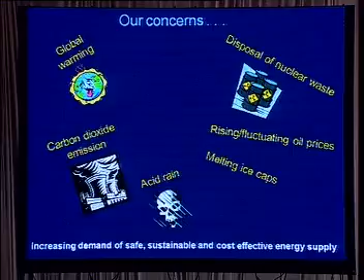So basically I'll be talking about high performance, lightweight, flexible solar modules, which are quite different from the ones you often see in the market. I'm not going to talk about all these concerns; you are probably aware of them. But I will tell you that when we look at the topmost problem facing humanity for the next 50 years, sustainable energy is the number one problem. Drinking water is the number two problem. There are many problems linked to energy. As you know, very often wars are fought only for energy.

Of course, there are various forms of energy, but we are talking about an energy which is safe and sustainable, and which will be abundant for mankind to use for comfort and to meet essential demands. The sun is the abundant source of energy and of the existence of mankind. Our planet Earth evolved from the sun and our life is all governed by the sun. Within 1 hour, our Earth receives enough energy to meet the global demand for 1 year. So there is no shortage of energy. We simply have to look up to the sky.

The sun is shining somewhere. There is no need to dig the earth to bring out fossil fuels or to still go for coal. People say oil and fossil fuels are abundant, there is no shortage, you can keep on burning, polluting the whole world. But one has to also look at the Stone Age. The Stone Age did not end because of a lack of stones. We are intelligent human beings. We should use our minds to see what is sensible, and the sensible thing is to use this abundant solar energy for the benefit of society.

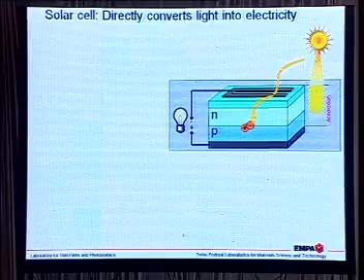It creates electron-hole pairs. Electrons are negative charges, holes are positive, and these charges get separated and move in opposite directions. Electricity is nothing but flow of electrons in a particular direction, and we have so-called solar electricity. So this is how the solar cell works: you have a device you expose to light, it creates electron-hole pairs which get separated because of the internal field, and then you have your solar electricity.

The most popular and well-established technology is based on silicon wafers. This is what you see. One silicon wafer solar cell is like one battery. It gives you roughly about 600 millivolts, or 0.6 volt, and you can connect them in series to get higher voltage and also to have some current.

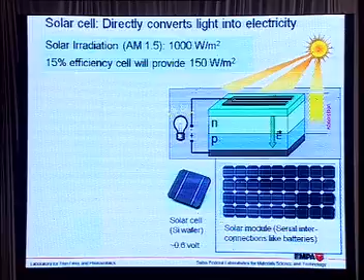This is called a solar module, and you might have seen them installed in many places. What we talk about very often is the efficiency. Just to give you an example, when there is very nice sunlight like today, it will have 1 kilowatt per square meter of solar irradiation. So if we have 15% efficiency, and 1 square meter of module, it means we will have 150 watts. This is just to give you the relevance of efficiency.

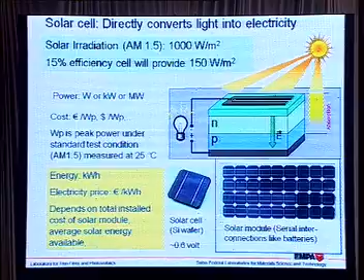When we want to use it for practical applications, we have to talk about the cost, given either in dollar per watt, euro per watt, or rupees per watt. When talking about electricity price, we talk about price per kilowatt hour, also called 1 unit. Here in India, it might be maybe 4 or 10 or 15 rupees per unit. So when you pay your electricity bill, you normally pay for the kilowatt hours you spend.

All the solar modules you see can be categorized into 3 types of installations. One is utility scale, meaning very large volume, some megawatts or tens of megawatts. These solar modules are installed in open fields, so they are called ground mount systems - very high volume capacity solar module installations. Then they can also be applied on the rooftop of residential, industrial, and commercial buildings. These are called photovoltaics applied on buildings.

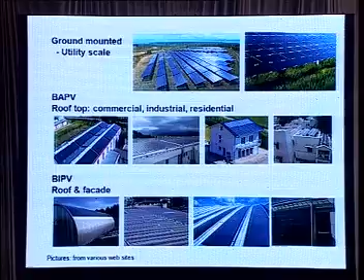Then there is another category where you use photovoltaic integrated elements - the roof or the facade, the wall itself is integrated with solar modules. This is called BIPV. In India, solar module installations are booming, and they are mostly ground mount utility scale. Building related applications are still not that popular or not in strong volume yet.

When it comes to the cost of solar electricity, here is one example. As you know, in Dubai they have an abundance of oil. So one would wonder why Dubai should go for solar electricity. They have oil, but they are thinking for the future - oil will end, and it creates pollution.

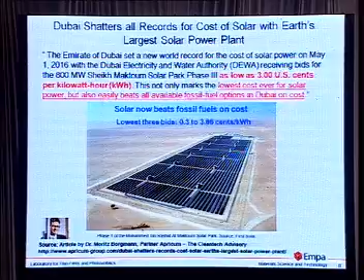So this is the cheapest bid which has been made, of 3 American cents. I think $1 US is roughly about 61 rupees, so you can calculate. This price of electricity in Dubai is cheaper than fossil fuel. So it means solar electricity, even in Dubai, which is full of oil, can be very competitive.

This was in 2016, I think, and within the beginning or middle of 2016, actually in May, within 6 months, the progress happened that the price went down to even 1.8 US cents per kilowatt hour. And that's not in Dubai, but in Denmark, Germany, where there is not so much sunshine compared to India or even Dubai. So it means solar photovoltaic technology is getting very cost competitive on a global scale, even in conditions where there isn't abundance of high solar insolation.

So when people ask whether this technology will work or not, these are the examples that answer the question of whether this cost-effective, clean, sustainable technology is working - it is no more a question. The solutions are already there. Now we have to see how we implement them and how we use them for various applications.

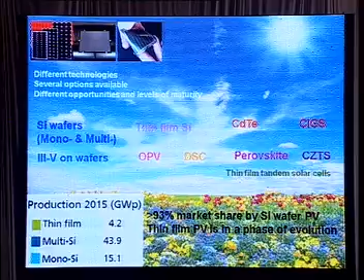In the field of photovoltaics, there are many materials, and these are called different technologies. One is, as I mentioned, silicon wafer-based technology - this is the most abundant technology. Almost 93% of the market share is taken by silicon wafer-based technologies. Then there are some other new technologies based on thin films and other new materials which I will be talking about - how they are useful and what potential they have.

At Empa, in our research lab, we work on cadmium telluride, CIGS, kesterites, perovskites, and thin film tandem solar cells.

Our research group of about 35 people are involved in various technologies, but we are focusing today's talk mostly on CIGS. When we look at the different generations of technology, the first generation, which is about 58 or 59 years old, is based on silicon wafers. These are like single pieces put together. They have been very successful. 93% of the market share is based on silicon wafer, but they have certain limitations, which I'll explain.

That's why we are looking for new materials or innovative concepts. The costs of silicon wafer-based modules have already gone down, and there is limited opportunity to further reduce the cost. The second generation of technologies are based on thin films. These are very thin coatings, less than the human hair thickness. Human hair thickness is about 50 microns, so we're talking about 1/10 of that, applied on glass, metal, or polymer film.

This is called thin film technology, and when you see some TVs, for example, or colored glasses, these are based on thin film coatings. If you replace glass with foils, you get additional advantages, like thin film flexible solar cells, and my talk will focus on this type of technology. There are also some new concepts based on organic materials, and I believe they are still far away from commercialization.

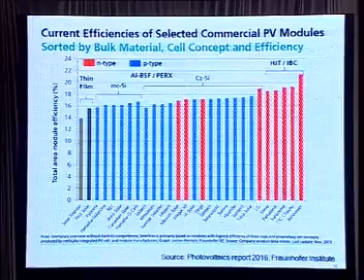These are some typical efficiencies of single crystal, multi-crystalline, and thin films. Thin film modules are somewhat lower in efficiency, but there is good reason to work on that. The efficiency difference of thin film is roughly 14 to 16% compared to multi-crystalline silicon, which is 16 to 18%. So roughly a 2 to 3% efficiency gap.

So why should one work on or think of thin film solar modules? First, crystalline silicon wafers require roughly 200 micron thick material because they have a very low absorption coefficient. Thin film materials have a very high absorption coefficient, so roughly 1 or 2 microns of material, almost 100 times thinner, is adequate to absorb all the light we want to convert into electricity.

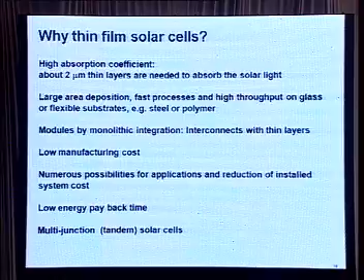One can have these coatings on glass, steel, or polymer films, and make monolithic interconnect modules—I'll show you what that means. Basically, it's a very nice, elegant, and fast way of interconnecting different types of solar cells. It has potential for low-cost manufacturing, lower than silicon wafer-based technology, because it takes a very small amount of energy to produce these modules. It also opens up various application opportunities that are difficult with traditional silicon wafer-based modules.

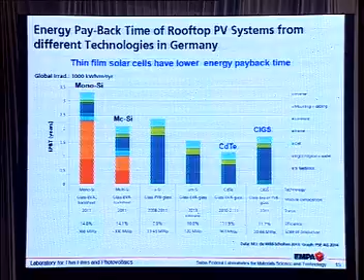What I mentioned was an advantage of thin film, and most important is the energy payback time. Of course, price is important, but sometimes if your daddy is very rich and can give you subsidy and support—like solar modules made in China are cheaper than anywhere else because the Chinese government gives a strong subsidy—somebody can sell at less than the production cost. But what's important is that the real cost is actually the energy. So what is the energy payback time? That's what you see here.

The energy payback time of cadmium telluride or CIGS thin film solar modules is significantly lower, typically 1.5 up to 2 years, compared to monocrystalline or multicrystalline silicon, which is typically about 2 to 3 years when efficiencies were still low. So we're comparing about 15% single crystal silicon versus about 11 or 12% cadmium telluride. Despite the lower efficiency of thin film solar modules, they have a shorter energy payback time because they take less energy to produce—it takes a lot of energy to purify silicon from sand to make electronic quality silicon.

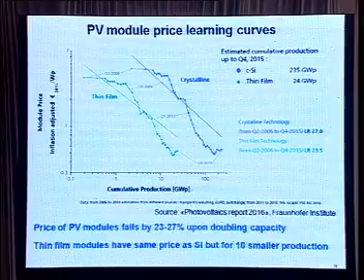So this is about pricing. The dark blue curve shows how the price of silicon has come down to about 45 cents per watt when factories reach about 100 gigawatt cumulative production. In case of thin film, even at a smaller production of about 10 gigawatt, you have significantly lower cost. So you don't have to invest in very big factories to reach a cost-competitive level. This is yet another advantage of thin film technology.

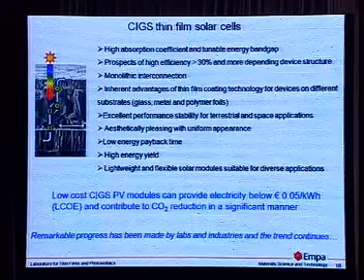Why we want to work on CIGS thin films: it has a high absorption coefficient, and the device structure is roughly 3 to 4 microns, about 1/10th of a human hair. We have fast coatings applied on large area, which gives very low energy payback time. It can be as efficient as multicrystalline silicon, as shown in research labs, and it will reach significantly lower production cost of electricity, below 5 euro cents per kilowatt hour.

It will have significant possibility to give CO2 footprint reduction. We are talking about technologies which will help reduce carbon emissions, and this type of technology has a very low CO2 footprint. So this is yet another advantage of thin film technology.

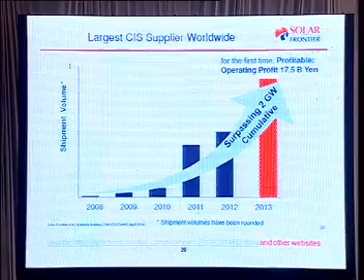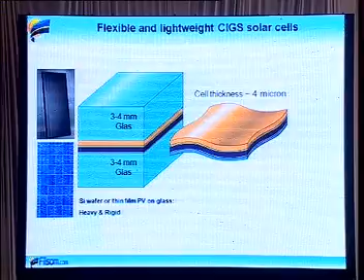When we compare traditional solar modules based on silicon wafer or thin films on glass, they are heavy and rigid. Actually, silicon wafers are very fragile - if you hold them, you can literally break them like this. So they need very special packaging and very good care until you make modules out of that.

And if you replace the glass with foil, then you have the possibility of making a flexible solar module.

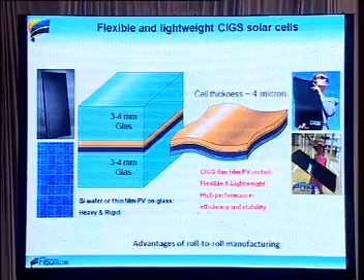If I take the traditional solar module, crystalline silicon on glass, 1 square meter will weigh anywhere from 12 up to 20 kilograms. It's quite heavy - sometimes for one person it's difficult to hold. Here you see a 4-year-old daughter of my secretary, and she is able to lift this solar module. So it's very lightweight and flexible, and it can be produced with roll-to-roll manufacturing.

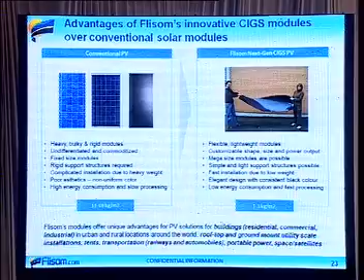These are some other summary points. It's not only about module weight and flexibility - imagine if you have to transport a solar module, let's say 1 megawatt, you'd need at least 5 or 6 large tanks to transport it. But if you have a roller type of carpet, you can transport solar modules easily in one big lorry or even one car. That gives additional advantages, reducing the cost of transportation and installation.

Another advantage relates to manufacturing, called roll-to-roll manufacturing. This means you take a roll of plastic or metal sheet, like a roll of cloth, and you unroll it and do the coating.

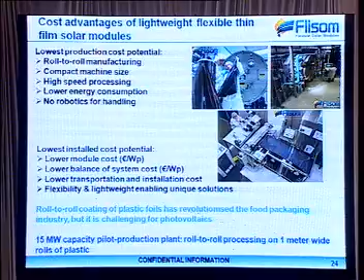How cheap can it become? I'll give you an example: when you buy a potato chips packet, it's nothing but plastic with a coating of some metal and oxides to protect against moisture. These coatings are done on rolls that are 5 or 8 meters wide, moving at very high speed, so they're very cheap. You eat the potato chips and throw the packet in the basket - that's how cheap they are.

So the idea is, can we transform this type of manufacturing for solar modules? It's going to be very challenging, like climbing Mount Everest, but sometimes you have to make an attempt. In academics, at the university, we make experiments - you can fail, but eventually you succeed. You keep trying, and then you get to very ambitious concepts.

This is roll-to-roll manufacturing, which is very innovative, and that's what we are trying to do with the company Flisom, which I established with my PhD students. One of our investors is actually the Tata Group company from India.

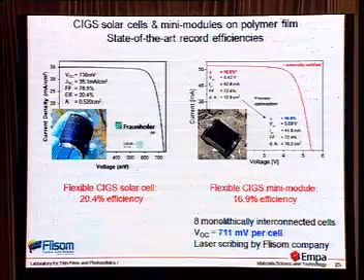So this is the research type of solar cell, and here what I'm showing you is a world record efficiency solar cell, which is 20.4% achieved, and this is independently certified efficiency measured from Fraunhofer Institute, developed in our research lab. What you see on the right side is actually a solar module. These are monolithically connected solar modules, so different solar cells are connected in series. So they are about 17% modules. So these efficiencies are as high as multicrystalline silicon.

So in our company Flisom, we have developed this whole manufacturing machine and plant. Coming from an academic environment, I would really like to encourage the young students, don't get afraid. When we did our research, it was a solar cell made on a fingertip size. And coming from the research labs, we are not equipment manufacturers. But we said, okay, my PhD students, we are not going to buy these commercial machines which do not work for these technologies. It will require about 100 millions. You can calculate how many, 1,000 crores rupees.

We said, let's do it step by step. We will make our own machines. And these PhD students, they were very courageous. We said, no matter, we will fail, fine, it's okay, we will try. If we fail once, we will learn, and then we will tell that, yeah, we tried, we failed, maybe we can do it better. If our effort is sincere, somebody is going to appreciate our failure. So take your courage, go with your conviction. Don't go for simple things that I can buy from here and be afraid that I will fail, what others will think.

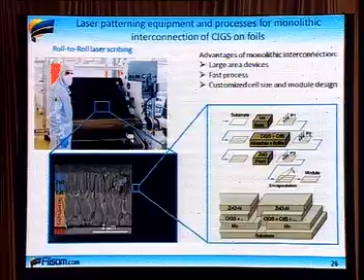No, when you make a very courageous step with all your sincerity, even if you fail, provided you are able to explain why you failed and what you learned, I'm telling you the world is going to appreciate, and that's what happened with our investors in Tata. Our research group is in Switzerland, and here is a company from India who understood the innovation in this technology. Despite all the risks, they joined our Swiss investors, and they have invested during the last 10 years continuously to translate from this research lab to a large industrial production of solar modules, which is like a plastic foil sandwiched between two sheets, one on the front and another on the rear, to protect against environmental and mechanical conditions.

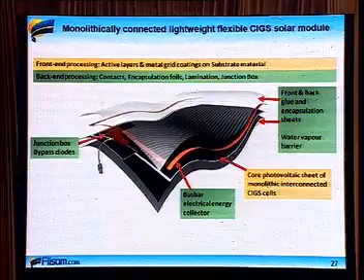I'm skipping, I'm not getting into all the details, but basically we have many process steps, and we have a factory in Zurich which won almost all the awards which any company can win in Switzerland, and in 2016 the Swiss ambassador in Delhi also awarded the company. This was a very prestigious award actually.

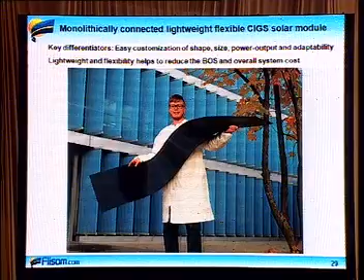So this is an example of this flexible solar module I'm talking about. You might not have seen it. So you see how lightweight this is. This is about a 3 meter long and about half a meter wide solar module. It's very lightweight. I have an example here. Because of the flight, I cannot bring the large one, but this is how the solar module looks. So this is a flexible, lightweight solar module. This is smaller in width, but you can have as long as 3 meter or 6 meter. We do the processing on a 200 or 300 meter long roll, which is 1 meter wide. After my talk, I'll be happy to show you this type of solar modules.

So you can literally keep your solar producing device in your backpack or wherever you want to use them. Another example of a very small application is this one. This is a mobile phone charger. It's a flexible solar module which is laminated on the case, and this is a connector. So literally you have power in your pocket. When you want to charge your mobile phone, you don't have to look for a power point. You can simply plug it in, put it in the sunlight. Half an hour will give you more than 1 hour of charge time.

It's not only for mobile phones, but when you need higher voltage or wattage, you can have many such small solar modules. And this is like my wallet, I'm taking it from my pocket. So here you have higher power modules. With this or somewhat larger, you can charge other electronic gadgets. These types of applications are absolutely not possible with traditional solar modules. You cannot carry this type of weight in your pocket. You cannot carry them in a rollable manner.

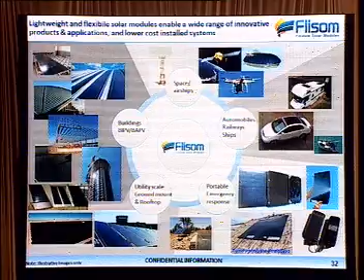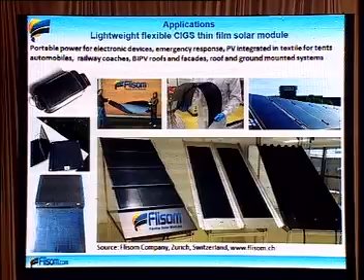On the other side, what you see on the left lower part is a very beautiful black aesthetics. Architects like them. So these are some of the examples which I showed. There are many possibilities, not only for ground mount and buildings, but also for space applications. If you want to launch a satellite, 1 kilo launching cost takes about 50 to 60 thousand dollars for geostationary. So if you have a lightweight module, you have additional advantages. So these are some of the advantages which one can imagine.

At this point I would like to stop with one comment: it's not that we have reached the efficiency limit of the solar cells. We can go beyond 20%, and actually in our research group we developed some know-how, and we are working towards 25% solar modules, and then we are targeting 30% solar efficiencies, but these are research-type devices. So at this point I would like to stop, and I would be happy to answer any questions you might have. Thank you very much.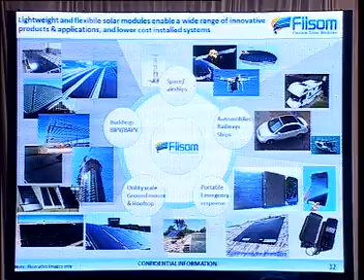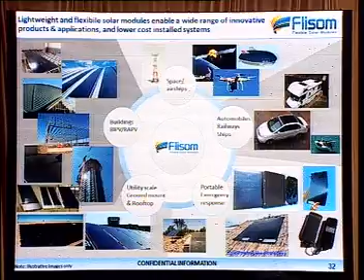Now it's a little bit of political will to see that there are clean solutions available. They don't have to be dictated by the oil companies, because these are big companies, and big companies want to have control over the electricity supply. Solar is about distributed power. You can have it at your home, your village can have it. You don't have to be dictated by big electricity companies. So this gives you a very good opportunity to have distributed solar generation.

Coming to the future, as I said, my answer will be biased because I'm working on thin film technologies, which are different from traditional silicon wafer based technologies. Imagine transportation. We have cars, bicycles, motorcycles, and aeroplanes. No single vehicle is good enough for taking care of all.

So different types of technologies based on different materials will eventually find different solutions. Traditional silicon wafer-based technologies, they are the market openers. They have done an excellent job, and now it's about finding the right solution for the right application, like a ball. With one small ball, you can play table tennis, you can play lawn tennis, but you cannot play football, or with a football, you cannot play table tennis.

Yeah? So the future will really be having the right type of technology for the right applications. And I bet the future is going to be, sun is abundant, so sometimes the wisdom will come and people will use solar electricity.

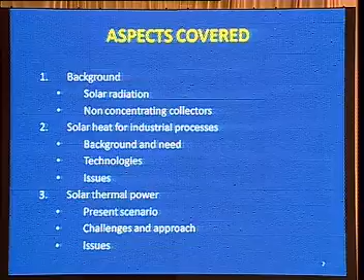It's on solar thermal energy. I'm going to talk on technologies, issues and future. I'm going to tell something about the solar radiation, my comments. Then I'll talk on industrial process heat. So solar energy can also be used for industrial process heat. In fact, that is an easier and direct way of using solar energy, and there is a lot of potential. Lot of things are already happening in India, and we are almost on the forefront in the world.

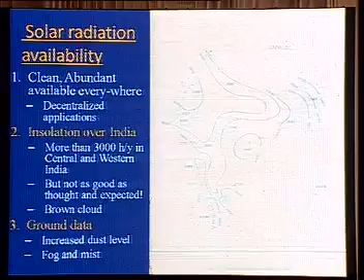We are also working on solar thermal power, and there are issues in it, and there are many advantages in it also. So I'll cover my topic on this. To begin with on radiation, as Dr. Tiwari has already told about the solar radiation being abundant, one of the things in India is we have good radiation. However, compared to last 30 years, the radiation has gone down mainly because of the pollution. So the one that is received on earth in India has gone down a lot by about 20 to 30%.

That's what we can see from the data of 1980 and data now 2010. There is a significant difference basically because of the brown cloud that we have on India and China. So whenever you design a solar system, it should be based on the ground data rather than on web data or typically satellite data. So that is one thing I would like to highlight. Okay, let's begin from this.

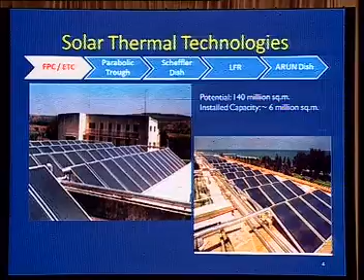We know that there are solar water heaters. Solar water heaters are widely used. They are used and there are evacuated tube collectors. Both of them go only up to 60 to 80 degrees Celsius. They are widely available. Evacuated tubes are available from China. About 80% of the market is from that. You are aware of this. They are used for water heating, cooking and other things.

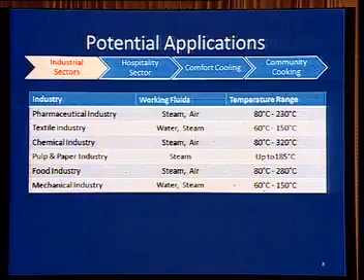However, can this be used for industrial process heat, which has typical requirement of about 80 to 100 degrees Celsius plus, minimum 100 degrees Celsius. It goes up to 200, even 300 degrees Celsius. So can we use solar energy for that? Is it economic? So these are the various industries with different materials, either air or steam or water. They use this energy as heat. So there is a boiler or air heater or water heaters. So is it possible to use solar energy in this situation?

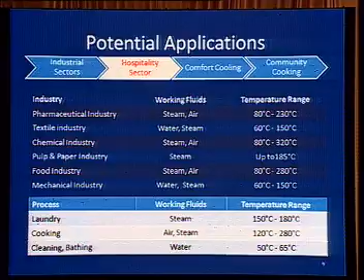That is the question. Also there is a lot of hospitality sector, there is a lot of energy consumption in laundry, cooking, cleaning. These are the normal day-to-day activities immediate to us. Can solar energy be used for it? And these are the typical temperatures that are required. So our water heaters and evacuated tubes are typically not useful for these applications.

Third thing is comfort cooling. Typically we experience that when there is more sun we require more cooling. So this is a good application of solar energy. So this can be done by vapor absorption system where heating a generator, a refrigerant generator can cool the system, and if the generator is at higher and higher temperature, it's better. The COP kind of efficiency is better at higher temperature of generator.

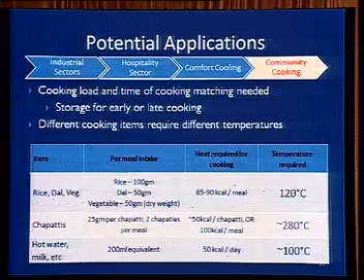So can this be done? Just another example is cooking in household or community cooking also requires the energy at this temperature. So can we use this energy, because most of these applications we use oil which is imported.

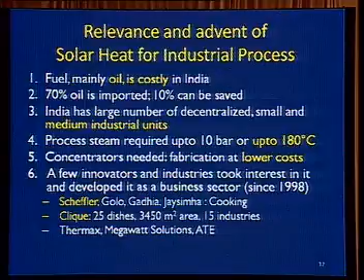70% of the oil is imported today. These are mainly in medium industrial units where land is available to put solar panels, solar systems. Typically we have to aim at about 10 bar, which is 180 degrees Celsius. We have a lot of skill, so concentrators can be used.

So the main thing is if I have to go to 180 degrees Celsius, flat plates are not okay. We have to concentrate the energy by some reflector, lens or something like that and go to high temperature. So these are a bit complicated systems, tracking is involved, but they can be fabricated because we have a lot of skills at lower cost compared to the world.

So about 20 years back many people started, 2-3 groups started in it, and we have started working on the concentrator. So I'll just explain what is this concentrator for the students and other participants. Concentrator is basically a parabola. Parabola is at the heart of the system. A parabolic reflector has a property that all rays parallel to its axis concentrate at its focus.

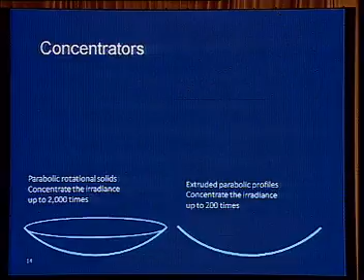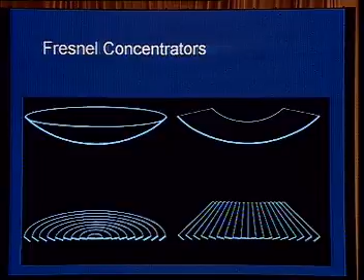So this property can be used in 2-3 different ways. This parabola can be rotated to get a paraboloid structure with a point focus, or it can be extruded to make a parabolic trough with a line focus. Further, this can be broken into pieces, brought on the ground on a flat surface. This becomes an LFR, linear Fresnel reflector, or the paraboloid can be broken into pieces, brought on ground, and that becomes a heliostat or Fresnel concentrator. So these are the four basic types of concentrators which are used.

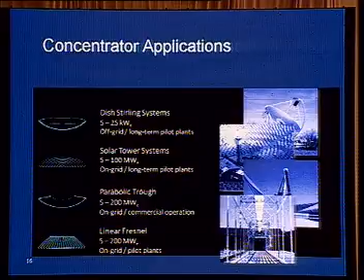They are used as paraboloid dish systems with a Stirling engine at its focus, or solar tower systems with a central tower receiver going to high temperature, or parabolic troughs which are very common with a line focus system, or linear Fresnel reflectors. Each one has different scales, different costing, different limitations also.

All these systems, when we compare, there is a basic equation that efficiency is given in terms of optical efficiency into the solar radiation received minus losses. So we work on this equation. In fact, a much more detailed form of this equation we use, and various components are identified so that we can identify how our system can be improved. So this is a basic form of equation, efficiency split into optical efficiency and loss coefficient.

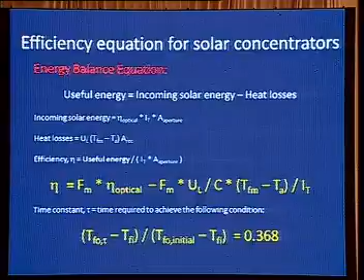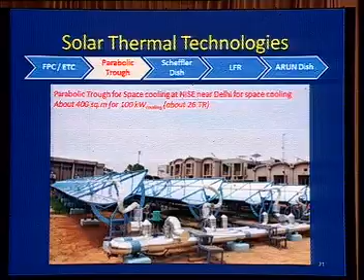In India, we do manufacture concentrators. There are 4 or 5 leading manufacturers. This is a system put in NISE, National Institute of Solar Energy, which is south of Delhi, near Gurgaon. This is installed for 100 kilowatts of cooling. It is a 26 TR system, parabolic trough, Indian made, without evacuated tube, and oil is circulated, and a lithium bromide system is used to cool the space inside the office of NISE.

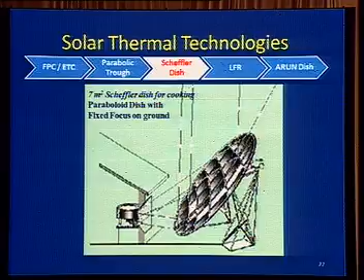This is a Scheffler cooker. You must have been aware of this name. A Scheffler cooker is a part of a paraboloid, and it has an interesting property that its focus is fixed on ground. So we can have a focus inside the kitchen and we can cook with the solar system. On a large scale, we can have many of them generating steam, and that steam can be used for cooking on a large scale through steam handling devices.

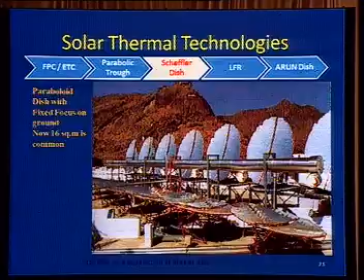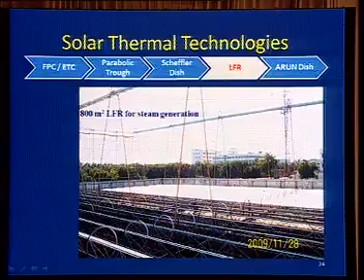This is a linear Fresnel reflector installed at a company in Coimbatore, about 800 square meters, in which mirrors are installed on ground. They are differentially inclined and tracked around circular trackers, and you can see at the top there is a receiver. So these are the two receivers on which the mirrors reflect all the energy. So we can pass water through it and go up to steam.

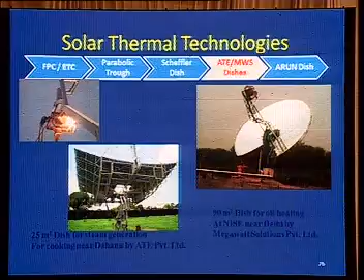Here the bowl, the reflector, is fixed and the receiver is tracking. So there are various kinds of it. We have 2-3 different designs from different companies of reflector: a 90 meter square reflector, and a 25 meter square reflector which has a paraboloid shape.

One of the interesting designs is the ARUN solar system, which we had researched on and commercialized. The structure need not be paraboloid in this case - it is flat, and the mirrors are mutually inclined to get the parabolic effect, so that quality control is very easy and cost can come down. This is being used as a solar boiler up to 10 bar or even higher temperature in industry.

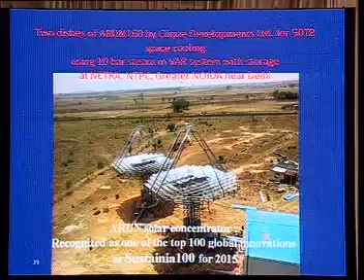This is again a picture of the same ARUN system, 160 meter square at NTPC Netra, Greater Noida, where it is used for cooling - about 50 TR cooling, 200 kilowatt cooling. This is at Akshardham in Delhi, a 100 meter square system.

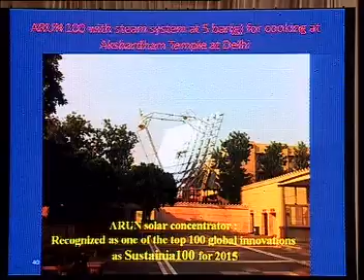So all these reflectors mounted on a flat surface concentrate the sun rays at the focus, at a receiver where it is boiling into steam. So it's a boiler, a solar boiler. We go through the IBR process and other things.

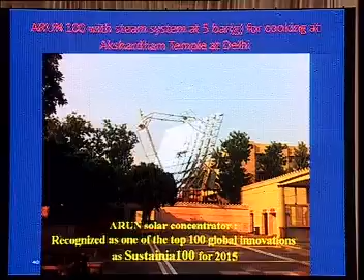So this is the application of solar energy for industrial processes for boilers, and we have come a long way, we have been doing it. Some of the pitfalls: we have to select a concentrator for the application. As I said, depending on the temperature, what concentrator to be used has to be selected.

Again, depending on the load characteristic - is the load during daytime or during night time - accordingly the system has to be selected. Should there be storage or not? We also need to have solar radiation data. If the radiation is very low, then it's not economic to put the concentrator to generate heat.

Also, what is the fuel saved? If the fuel saved is costly, if it's oil or gas, it's a costly fuel, so saving it is more economic. However, if I am using it for coal, then there is a problem - the economics is not that good. So I have to look at the fuel being used in the industry. But at present, about 30 to 35 industries in India are using such systems.

One of the challenges here is integration. Solar energy has its own whims and fancies - it's available only during daytime and there are cloudy hours. But industry cannot agree to that. Industry works 24 hours, or maybe sometimes only small hours it will require the heat. So we have to optimize the integration - how much storage to be provided, how much collector area to be provided.

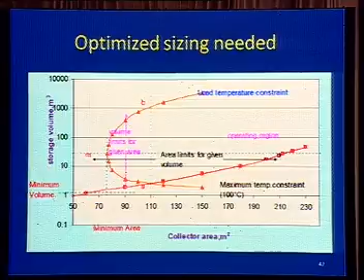This needs to be done, and this graph shows that an allowed combination of collector area and storage is studied by optimization methods.

One more thing about this application is cogeneration. Here in Ramnathpuram, Tamil Nadu, south of Tamil Nadu, a Coimbatore company, KGDS, has installed this system which generates steam at 40 bar and generates power, and then the spent steam is used for desalination. So in the Ramnathpuram area where there is a drought, sea water is converted to potable water by this system, and a 24-hour system is installed there.

So this is also an interesting application of solar thermal energy at high temperatures with concentrators. With this background in India, we have a lot of work done by various industries, various groups in concentrators. We are now looking forward to solar power systems.

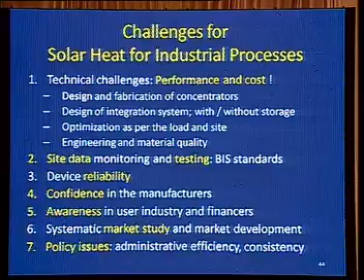The issues are: how is the performance? Can we assure the performance? What is the cost? Of course, for oil or gas replacement, these systems are economic, with 2 or 3 years payback, but it all depends on the site data. One of the major challenges today is reliability of these devices for the long term, 10 years, because these are moving systems, complicated systems. So professional engineering needs to be done.

So this is the problem about industrial process heat, and with this experience we are now going to solar thermal power. You will ask me what is the relevance of solar thermal power. One issue is solar thermal power is costlier - compared to solar PV, solar thermal is certainly costlier. It's about 14 to 25 crores per megawatt installation cost, compared to solar PV of 6 to 9 crores per megawatt.

So it's about 2.5 times the solar PV cost. However, the capacity factor is about 1.5 times. Solar PV works for 1200 to 1500 hours a year, but this will work for up to 2000, 2500 hours per year. So that doesn't really make up that much. So what is the relevance of it?

Before that, let me explain what solar thermal power is. Typically a concentrator - on the left we have shown this concentrator. Oil is heated and the hot oil is circulated through superheater, boiler and preheater, by which steam is generated and the turbine runs. So it's a normal thermal power plant, only the steam is generated by solar energy at that temperature, maybe about 400 degrees Celsius or something.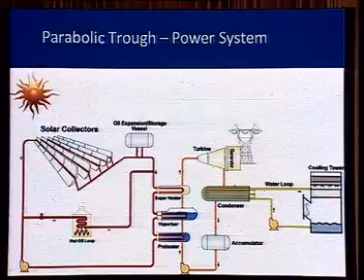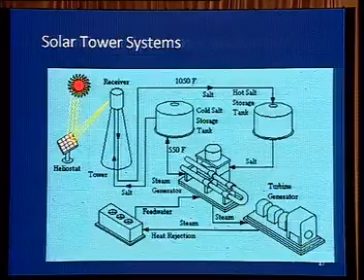And then of course there are other power systems. This can also be heated at night by hot oil, so we get power throughout day and night. Other possibilities include the heliostat, central tower systems, which can concentrate solar rays onto a receiver and heat molten salt to very high temperatures of 565 or 600 degrees Celsius, and this can be stored. So this is one possibility that solar thermal technology opens up - we can store thermal energy and generate even at night. So the problem of peaking and the problem of continuous power supply as base load can be addressed by solar energy. That is one of the major things.

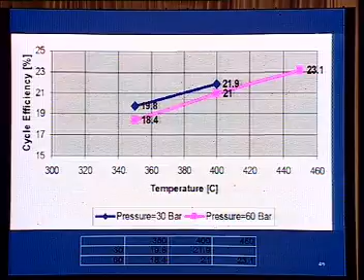One issue is, as we looked at the graph previously, as temperature increases, efficiency of the solar plants decreases, but as temperature increases, turbine efficiency increases. So we have to decide at which point to operate. If I operate at lower temperature, I will get more energy, but turbine efficiency will be lower. If I operate at high temperature, say 500 degrees Celsius, turbine efficiencies are good, but solar efficiencies are lower. So we have to strike a balance and optimize the system. This is one of the design issues in solar thermal power plants.

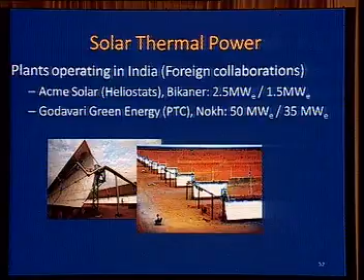We have 3-4 power plants in India. This is Acme Solar at Bikaner, 2.5 megawatt operating at 1.5 megawatt. This is a heliostat bed - you can see the mirrors distributed all over the ground and a central tower onto which all the mirrors reflect the energy. This is a parabolic trough, Godavari Green Energy at Nokh in Rajasthan. This is the Reliance Areva system at Dhursar, 125 megawatt - this is an LFR system.

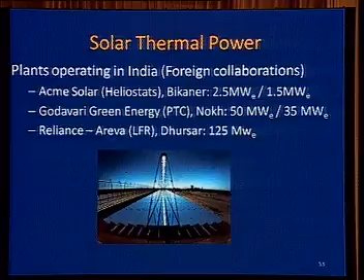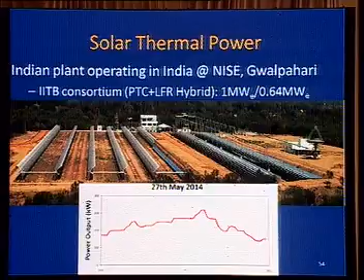So we have all three types of systems, and one system that we at IIT have designed and installed at NISE in Delhi is a combination of technologies. On the right you can see the LFR system, on the left the parabolic trough system. LFR systems go to a lower temperature of 250 degrees Celsius but are more economic, so it generates steam that way, while the parabolic trough heats oil to 400 degrees Celsius and superheats it so you can get better efficiency from the turbine. This combination is unique - nowhere in the world have people done this, but we are running a plant on this system.

And there is a test center also - on the right you can see a small building which is the test center. This is the data we actually generated power with on 27th May 2014, and you can see it has gone up to 600 kilowatts for some time, 2-3 hours.

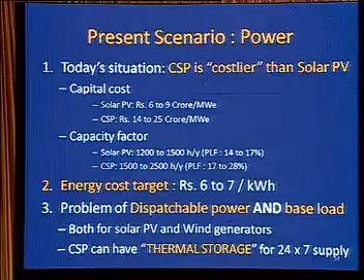So as I was saying, the issues are like this: it is costlier. Our energy cost target is up to 6 to 7 rupees per kilowatt hour - if solar thermal can meet that, then it makes sense. However, one advantage of solar thermal is dispatchable power, in the sense that it can act as base load - it can provide power from 6 o'clock to 8 or 9 o'clock at night. That is an advantage of solar thermal power. Solar PV or wind cannot do this unless there is battery or compressed storage, which are inefficient by themselves.

24 by 7 supply is possible, and many people are now working on it. For this we have to work on heliostat controls, and we are working on cavity receivers of new types.

Cost is another issue. So while doing this, the cost should not shoot up. One thing is that most of the parts of these technologies are available in India, and we can 100% indigenize. So we are not dependent on any other country.

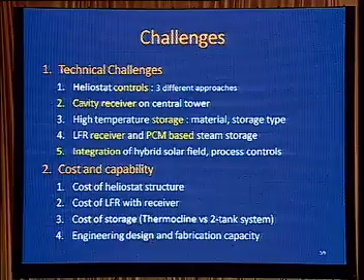For example, silicon based PV panels are at present 100% imported from China. So there is a lot of activity, but it is not encouraging local economic activity. This is one of the problems of silicon based solar. This system can also address that, provided we can develop this engineering and fabrication capacity here. So there are various groups working on it.

IISc Bangalore, through its SERIUS project, is a solar energy research collaboration between India and the US system, working on heliostat design and farm layout. So, what should be the size of the heliostat, how does it track? These are the issues they are trying to handle.

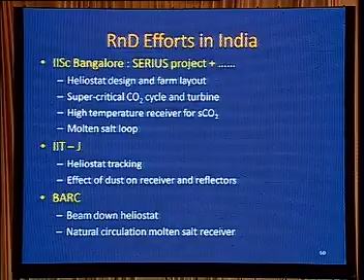Supercritical CO2, supercritical carbon dioxide, is an interesting variation rather than the steam system. Instead of water converted to steam, you can have 300 bar pressurized carbon dioxide heated to 700 degrees Celsius, and that can be used as a material for transfer of heat and extraction of power from the turbine. This is what IISc Bangalore is working on. This can have very high efficiencies of 50% plus, maybe 60%, so this is an advantage of it.

Molten salt loop - having a molten salt loop, what materials to use, how to handle it, what pumps and other equipment are needed - these are issues IISc is working on. IIT Jodhpur is working on dust deposition, degradation of the receiver and reflector, and tracking of heliostats.

BARC is working on another concept called beam down heliostats. All the heliostats concentrate on a mirror at about a 50-meter high tower, and that mirror is shaped such that all the energy is brought back down to the ground, so that the boiler and storage system can be at ground level. You don't have to pump anything. So natural circulation molten salt receiver - they are working on it.

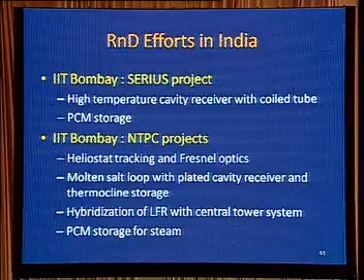In IIT Bombay, we are working on a high temperature cavity receiver with coiled tube, which is not typically used. We are also working on PCM storage in this SERIUS project, and we are also working with NTPC, because they are the power generators. If some of their heat is replaced by sun, then we can save a lot of coal emissions and other things.

On heliostat tracking, Fresnel optics especially - because all over the world the receiver heliostat is actually curved, instead of that, can we have Fresnel optics so that flat structures are used. Molten salt loop with plated receiver - this is a new concept that we are working on.

Thermocline storage, in the sense that instead of 2 tanks for storage, we can have 1 tank with layers of heat in it - that is one possibility. Hybridization of 2 systems as well as phase change material storage - these are the issues that we are working on.

In India, we see that 24/7 power can be available through solar, which can have a dent on the power scenario through renewables. Otherwise, that is considered a problem with renewable, that it is not available on demand - whenever sun is available, whenever wind is available, only then power is available. Instead of that, through storage, we can generate power whenever we want. If there is peak demand, we can supply to that. That is the aim of all of us.

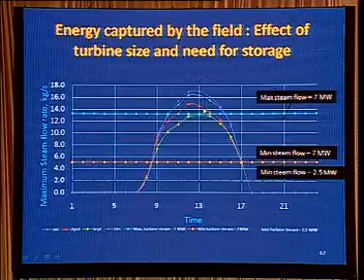Instead of that, if I have storage, then I can have a 2.5 megawatt system running continuously. Say for example, this 2.5 megawatt has its minimum steam flow rate at this level, the white dotted line. So I can start early at 8 o'clock and end at 6 o'clock. And anything above it can be stored and fed in the night. So that is how we can optimize.

Typically the numbers show that if I optimize without storage for a given field, I get about 10% variation in the generation. So instead of 7, if I put 3 megawatt, it will generate less. If instead I put 10 megawatt, it will generate less. So there is an optimum value of 7 megawatt for this field.

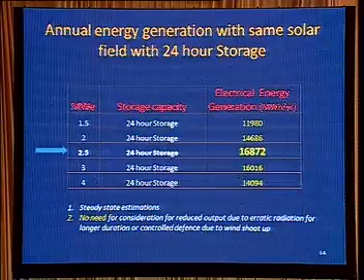But suppose I run it with storage, I can generate 10% more. So instead of 15,000 megawatt hours per year, I can generate 16,000 megawatt hours per year from a 3 megawatt plant. So this is the role storage plays. So mastering the handling of storage and the controls of the system is what we are all working on.

In this, of course, we are also globally partnering with various agencies, mainly for testing labs, reflector testing, life of reflectors, their degradation, and improvements on critical components, especially reflectors, collaborating through NTPC, through IFC, or various projects.

And one of the major issues that we need to face is awareness. In a way, that's why I am here, to say this can be done. Solar energy can go up to 100 degrees Celsius, 200 degrees Celsius. We are now thinking of 565 degrees Celsius. So solar energy can generate this, and we can use it effectively even in industry. It's not only for power. A normal industry can use solar energy and save a lot of oil and emissions. So this is what we are working on.

If the masses come in, we work on various issues together, and we can accelerate the development very fast. So that is what I have to say.